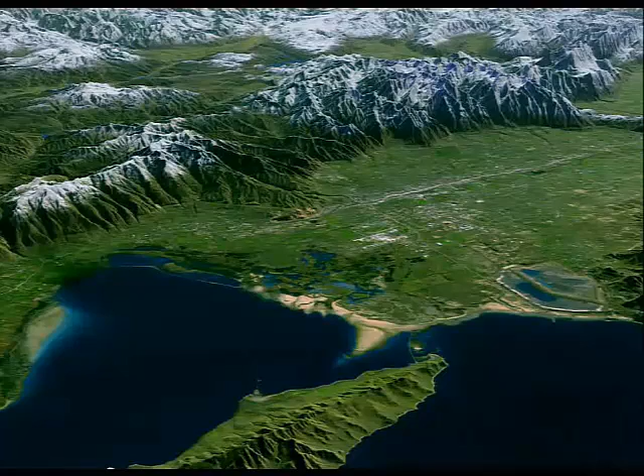City Creek Center is our case study for this session, and we've kind of already introduced ourselves, so we'll skip right over that. City Creek Center is located in the Great Basin. It's in Salt Lake City, which is at the foot of the Wasatch Range. The valley there has a population of about 1 million, and the city itself has a population of about 200,000. The site is a 23-acre site, which is 2 blocks, located right downtown Salt Lake City. And it's on the path of the original course of City Creek.

City Creek is important to the developer, the Mormon Church. They have a residential development arm called CCRI. And they basically wanted to celebrate the role that City Creek had played in the settlement of Salt Lake City. The pioneering Mormons who settled that valley in 1847, they camped next to this creek during their first year there. And they diverted the water, flooded some land, and were able to plant some potatoes, and those potatoes got them through their first winter.

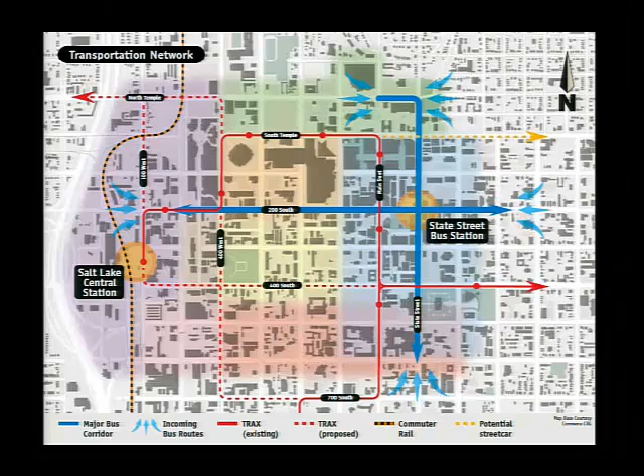Today, City Creek Canyon is a dedicated open space, and the water from City Creek is still used for agricultural as well as domestic water use. The project site is directly across from Temple Square. This dark area is the site, and it's also adjacent to the convention center, and it's well served by mass transit.

A typical block there is 660 feet by 660 feet. A city like Portland, Oregon, which is much more pedestrian friendly, you could fit 9 blocks of Portland into one of these blocks in Salt Lake City. So the key was to break up those large blocks and allow cross circulation for pedestrians.

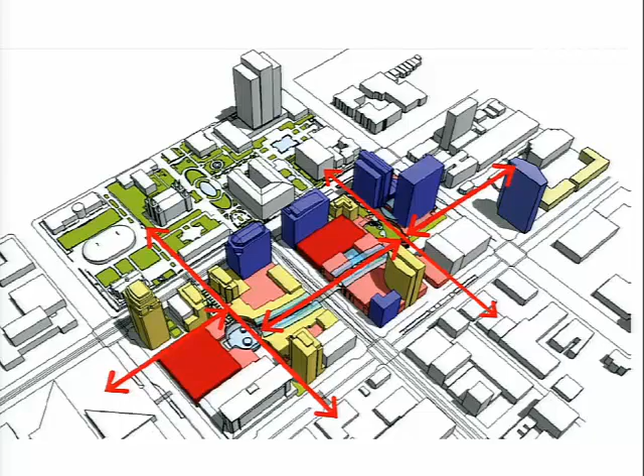This is our final illustrative plan, and you can see there's cross circulation through the site, and the primary feature of the circulation route is a recreation of City Creek. It has creek elements, large cascade elements, and also some oxbow type features. The developers also wanted some of the courtyards populated with more formal and interactive fountains.

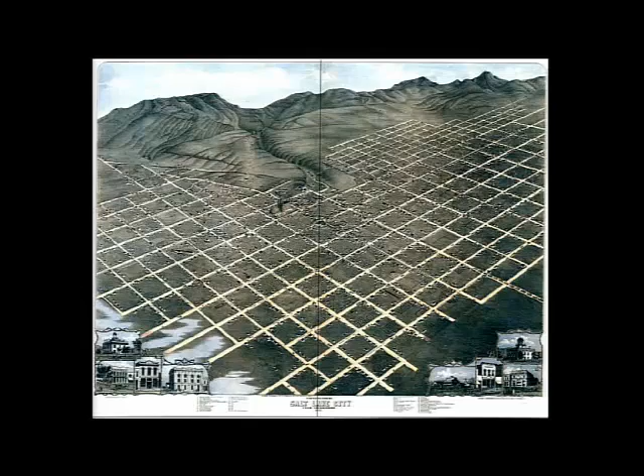In the beginning of the design process, the developer told us the history of the creek, told us how important it was to the founding of the area. And they showed us images like this, and said this is what they want in this project.

And we really struggled when we saw an image like this, and we knew what the program was: 2 stories of retail over a 5-story parking structure. We really scratched our heads, and they kept sending us pictures of the real City Creek. We started to get a feel of what they were talking about, but we didn't quite understand how we were going to make that a reality.

After a number of initial sketches and them telling us we'd kind of missed the mark, they suggested that we hike City Creek. So the first time we hiked it, it was in the winter. And you can see it's a real creek. It's got rocks, it's got water, lots of native plant material.

We studied it. We started to get a feel for the width and the flows, and even some of the different characteristics, like this trout pond up in one of the meadows. And of course that means there's trout in the trout pond. As the design went on, the developer told us not only do they want native plants, they also want real fish -- indigenous cutthroat and Bonneville cutthroat trout, and brown and rainbow trout -- within the mall.

So when they told us that, we realized we were a little in over our head. So we hired a botanist to study the real City Creek, and they provided us with essentially a shopping list of what was there, and an idea of what we could try to replicate within our project.

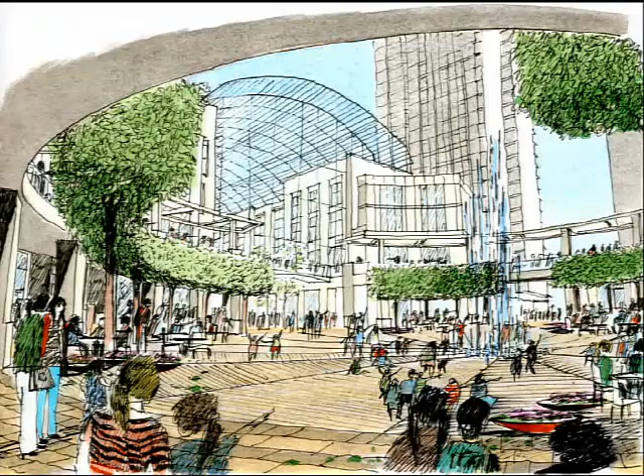It was very useful, and as we did all of this, we got the comfort level from the ownership that we had finally understood what it was they were trying to do. So we went about schematic design and started to incorporate some of these elements, like this oxbow feature we had proposed at one time, a fish pond, and of course some of the plazas that would have the more thematic and interactive fountains.

So through those early design phases, a big part of this was how wide to make the retail space -- how much room do you need to walk. And of course the retail developer, Taubman, who partnered with CCRI, they were very concerned about sight lines to storefronts and cross-shopping. So this idea of the creek going down the middle of the mall was a real challenge to keep both owner groups happy.

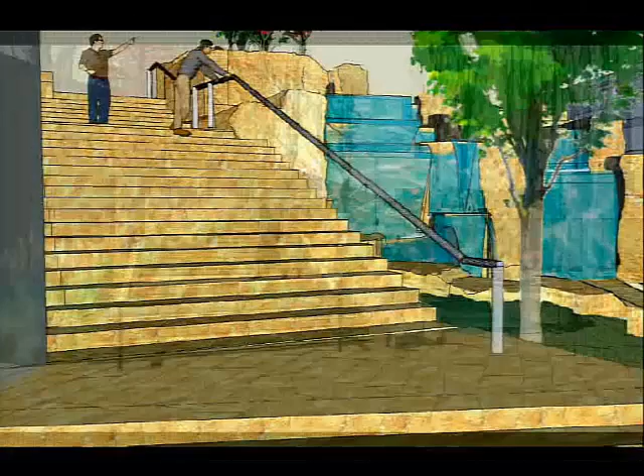But we went through the process and kept refining and refining, and we got to the point where we were doing these SketchUp and AutoCAD renderings, then Photoshop ultimately, and we got the go-ahead that we had figured out what they wanted, and the next step was, how do we build this?

You know, all those pictures you saw of the real City Creek featured real stone. All the renderings we did had stone all over them—paving, seating elements, and of course the water features themselves. At the same time this project was going on, downtown Salt Lake City was beginning to realize they needed to really renovate downtown, and they had a master plan called Downtown Rising.

This project was going to be the first to really kick off Downtown Rising. The idea was that if we set the right tenor for its architecture, its landscape, its quality, its purposeful development, people in other parts of the city could carry on that same kind of design intent. They wanted this project to capture and show off the quality that could be done as a redevelopment project in Salt Lake City.

They wanted this project to be kind of the example for projects that followed it, as far as the permanence of the design and the permanence of the materials.

Can I say something? You certainly can. So, two things. One is it was really to set the bar for the rest of the design for the whole of downtown Salt Lake. That's what Ross is saying.

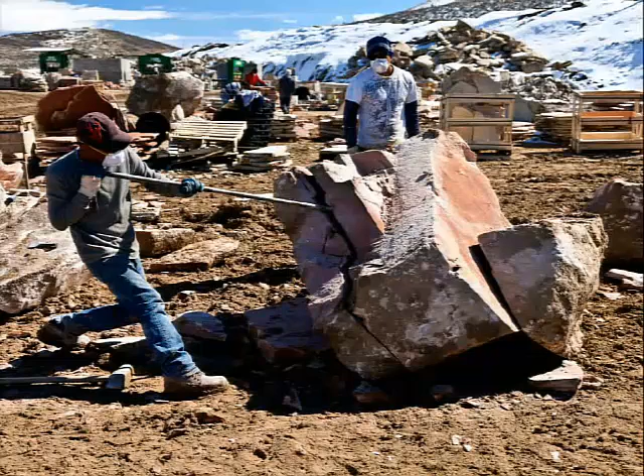Since we needed naturalistic boulders, we basically fell into the Mountain Valley Stone quarry. We went up to that quarry and learned which forms that material can take, whether it's flagstone or cobble—other regionally available material was cobble, used extensively on the project. This is some river cobble. We also had monolithic blocks that we used for seating.

This particular stone came from Wyoming. In addition to the more informal naturalistic elements, we did have some formal elements with more architectural character, and we turned to Cold Spring to select those stones. These stones were also used on many of the buildings throughout the project.

We studied different ways we could treat the material—bush hammering, thermal finishes, etc. In the end, the five different architects involved, across these 13 different buildings that become this one thing known as City Creek, developed a palette that worked across the entire two-block site.

There was one challenge we had with fine-tuning the final selection. When they started honing in on what type of stone they wanted to use, there was a variety of granites, and there was our quartzitic stone that we'd been providing and recommending.

At the time, we always referred to our stone as a really hard sandstone, and that caused a lot of problems, because the first thing people hear or think of when they hear sandstone is the Grand Canyon or Arches National Park—places with soft stone that will literally wash away under the right conditions.

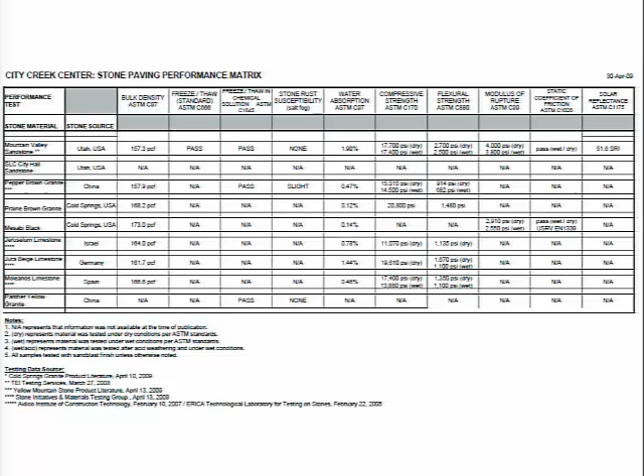In particular, some members of the Taubman team, the retail developer, basically said you never use sandstone horizontally—you can only use it on the sides of buildings. In the end we showed that the Mountain Valley stone was really a contender and was able to withstand this use.

The image I showed earlier of that retail corridor, the primary Galleria space of the mall, involved a lot of back and forth between the CCRI arm of our client and the Taubman retailer side. We went from 30 feet wide to 45 feet wide, and we kept changing whether the creek was 5, 6, or 7 feet wide.

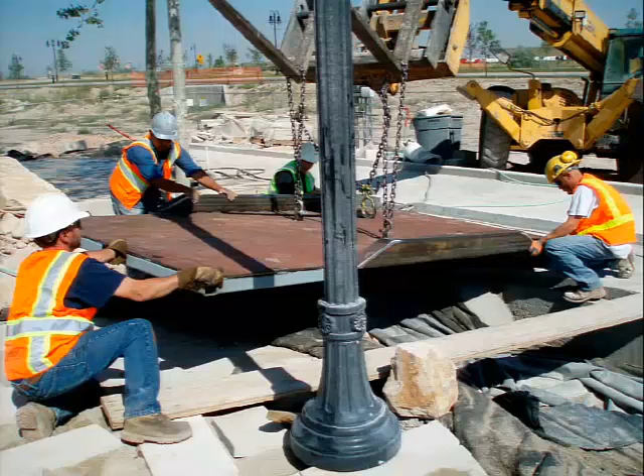It became so uncertain that once we had something we thought would work, the clients decided we'd better mock it up before going further into design to prove that it would work. So on a remote site, we built a 50-foot long, 35-foot wide example of what would be the primary condition through the center of this retail center.

It included cast iron bridges, which would address the retailer's desire for cross-shopping, and all the different paving patterns we were developing during this design development phase. We even experimented with a couple of different materials.

We included the light poles, planting, boulders, slot drains, and drainage elements for these trees. These trees are aspens that really shouldn't be living down in the valley, but we were able to find a grower low enough that we could use that plant material on this site.

We also had the advantage of using this mock-up, really a design test mock-up, to flesh out design elements like how we'd treat the stone edge, and how we'd incorporate the riparian plant material required for a habitat that would support the fish.

Once this mock-up was completed, we had about 30 representatives from the church and Taubman come out, and we even put fish in it. We ran it for a day with fish in it, and we left knowing that we had something that would work.

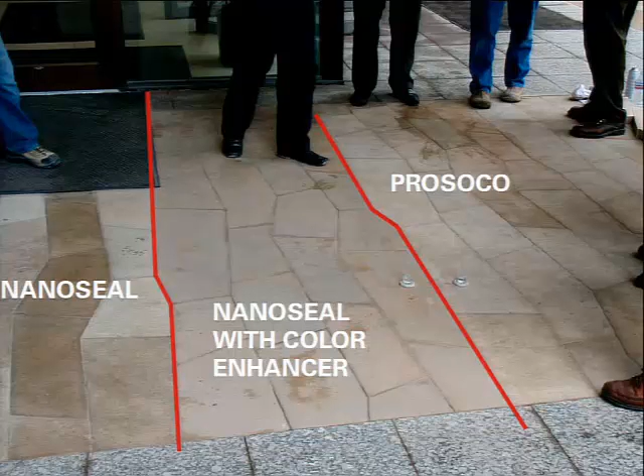So the next challenge, in addition to that mock-up, was that Taubman was again very concerned about the sandstone. That issue kept coming back, though they got away from worrying it couldn't handle freezing because of the data we showed. Their concern then became what happens when you spill ketchup, mustard, or chocolate on it.

So we did another mock-up in front of one of the existing towers that wasn't affected by this development. For about a month, they let pedestrians walk back and forth across it and tested different sealers. They ended up settling on the PROSOCO sealer after this.

Since the stone was really locked in now, SWA needed to become educated about how to detail this stone and its limitations and abilities. So we went up to the quarry and spoke with Luke. This is where SWA was really great to work with.

They had a desire to learn exactly what we could do with the boulders, and came out countless times to look at boulders and climb through the boulder piles. The quarry is a boulder quarry—we don't have real consistency in our boulders. They could be fist-sized, or they could go anywhere up to 400 to 500 tons apiece.

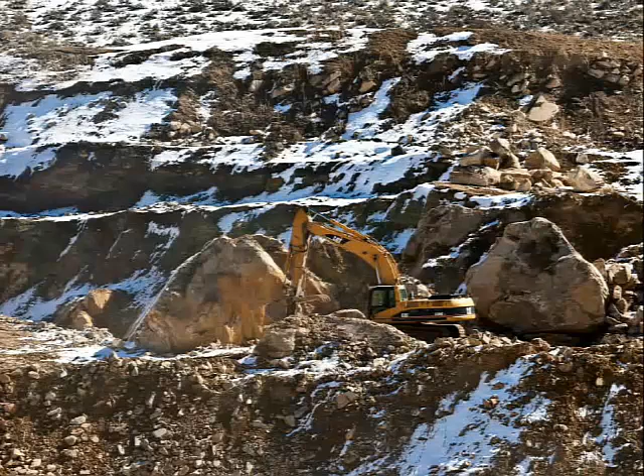So we don't have that consistency in the boulder sizes, but they were willing to come up, sit down, talk, and freeze to death, because this was all going on during the winter time. If anybody's been to Utah, you know that it will be cold.

With the boulder quarry, we do very little blasting. The quarry has been around for over 100 years. It's been used all over in Park City, any Utah area, and has done extremely well with the freeze-thaw, something the clients weren't quite sure of, but we had the data, like Ross has said, to prove that it would last with this application.

So you can see through some of this, the boulders and the sizes of them. That's snow. So some of the challenges we get as we go through the quarry involve the big boulders. Some can be up to 10 to 15 feet tall and weigh well over 100,000 pounds. The way we deal with that is we'll plug and feather it, and use an expandable material that overnight will expand the rock and split it in half, lifting up to 24 tons.

At times we have to use 2 or 3 of those to roll some of the boulders around so that we can use an expanding concrete in them. We'll drill them, put the concrete in. During the winter it takes 2 to 3 days; during the summer when we drill and split them, it'll usually take a day. That's our method of breaking them down into more usable product.

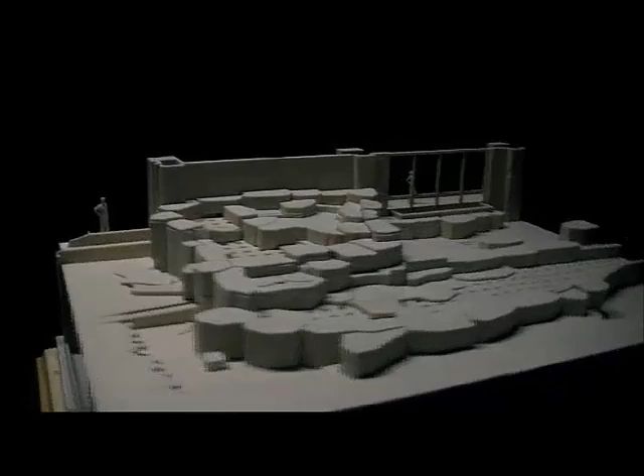You can see here there are models that we used not only in the design process to get ownership to sign off, but we ended up using these models out in the quarry to help find boulders that could become these individual pieces.

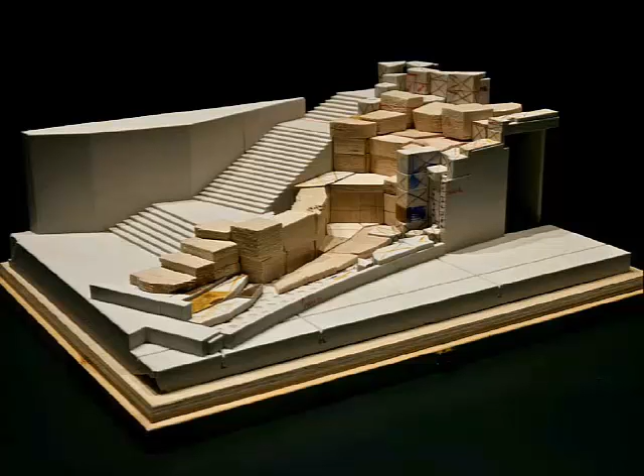During the design process, the ownership would come in every now and then and review things. 'Oh, well, I want a better sight line into the food court,' and we would have to adjust the model. Every time you go into a 3D printing process, it's a little time-consuming and fairly expensive. Each one of these rectangular models is about $12,000 to $15,000.

So we started changing the pieces out of foam or balsa wood rather than keep reprinting it, because we had continual changes to it as we were finishing the design. We also ended up finding particular boulders out in the quarry that maybe didn't quite fit what we had modeled, so we would reshape boulders out there and then change the model again to reflect that.

There were a lot of boulders for this project. I think it was 367, if I remember correctly, in the fountains, but there were over 800 total, including the creek beds. Special selections, and we worked very closely with KEPCO on the selection process.

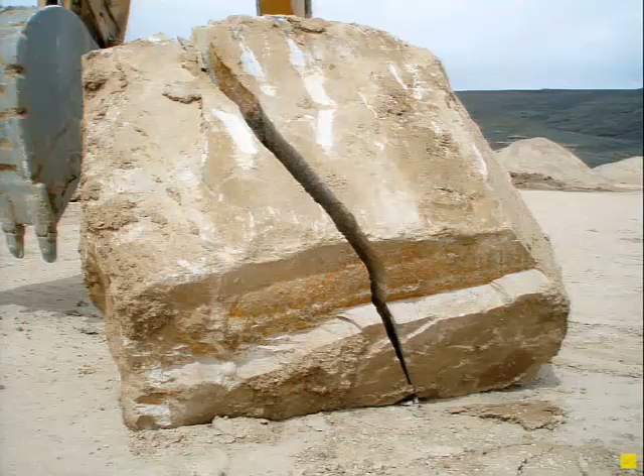Part of the process as we were out there selecting these boulders was Jeremy, Ross, we would come out, we would have a bunch of boulders selected for them, we would tag them with our tags of what sizes they were supposed to be, and then we would photograph them, and the boulders come out of the ground. The quarry is anywhere from 200 to 385 feet deep, so coming from that depth to the surface as we were digging and pulling them out, they're wet, so they're still green - they haven't seasoned and dried out yet.

A process that we would do with them was we would take them and bury them under anywhere from 6 to 8 feet of soil to try and keep the moisture from freezing and cracking the stone. As you can see in that other picture, that one had a giant crack in it, and sometimes it worked for us really good and sometimes it wouldn't. Sometimes we would pull them out and then we'd have to frantically try and find a new boulder that was that size for them to look at.

This is something I had never even thought was an issue - that you can't just take a boulder out of the middle of the earth and just bring it up and start using it. Things like this big crack of a boulder - Jeremy and I would almost know these boulders by name at some point. It's like, oh no, we lost H4, and so then it's back to the hunt. So the seasoning was something new for me.

Okay, this is what's known as the flagging process. This is the material that was used in the creek side that Outside the Lines purchased. As you go through this process, you'll see that we're high-grading this into 1-inch material, 1.5-inch material, 3-inch and 4-inch material. As we go through and we plug and feather - this is a traditional method that's been used for thousands of years - as you go through it, when you split, you have to look, listen, and feel as you're splitting the stone.

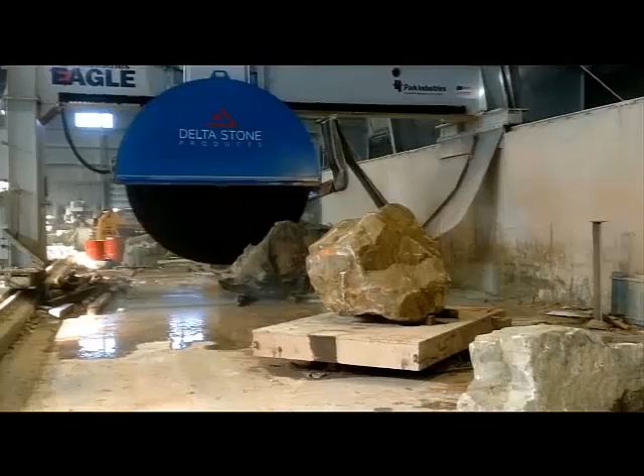This presented a challenge as the fabricator. Typically you don't have your customer come tell you how to cut your rock—there's cut tickets and drawings, and you cut based on what you're trying to get. But in this case, because of how everything had to come together, Jeremy would come in and he'd lay out the stone. This is a custom turntable we built for our big saws.

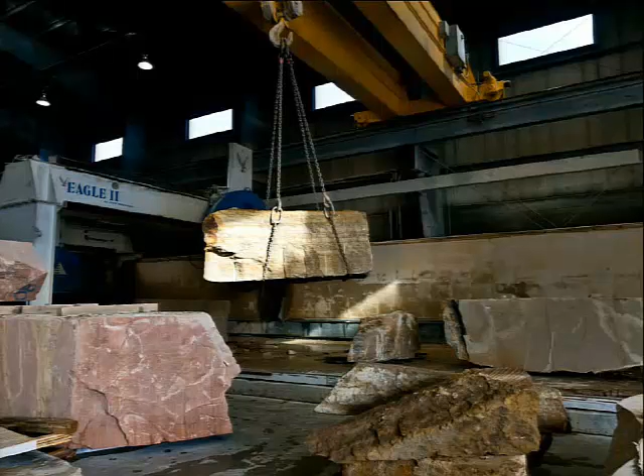Those are 12-foot diameter blades. We built this because every boulder had between 1 and up to 10 cuts that were never perpendicular or parallel. This aided in speeding up the cutting process and made a huge difference in quality and accuracy as we were cutting.

One thing that would happen is they'd be out on the mock-up, which he'll show in a second, and Jeremy would come in right before we were about to cut a boulder—because we were cutting it as they were building it—and as this evolved, he'd say, wait, we got to move it an inch. Our operators were almost pulling their hair out, but luckily we had a good team and we all worked together, and it went really well.

As you can see here, that's probably an 8,000-pound boulder that now only weighs 1,500 pounds. Most of the rock is actually cut away to leave the natural face on the outside. That L shape on the left of the boulder would actually present itself as a natural looking solid boulder if we turned it the other way, but in reality 3/4 of it has been cut away.

The mock-up that Aaron was just talking about involves 2 parts of engineering design, particularly in Salt Lake. One is that it's actually in a seismic area, and because of that seismic movement, each of the areas that Ross was talking about—different buildings and parts of buildings—actually met and had movement joints, and believe it or not, ended up right in the water feature. We've got these big 6-inch movement joints that we had to accommodate and allow for in the actual water feature itself.

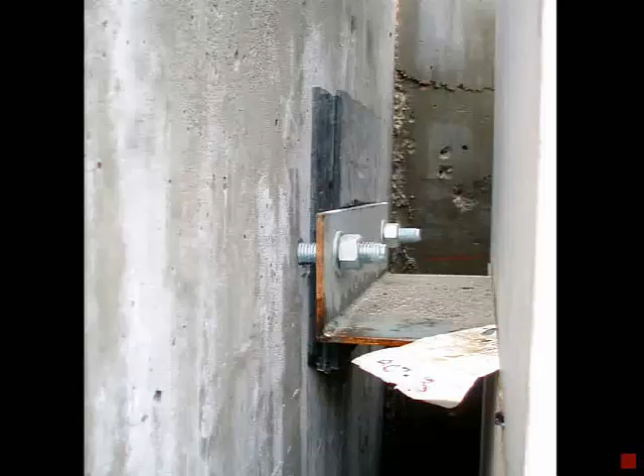The other part was, as you can see, you're talking some seriously large boulders needing to be restrained so that if there is an earthquake, the boulders stay where they are and don't tumble down. This is just a mock-up detail—on the actual mock-up we were just using them to hold them in place from a gravity perspective. But typically you're talking 6,000 or 7,000 pound boulders with a 50-pound attachment system and anchor bolts that cost $70 each.

That all had to be waterproofed and detailed and coordinated carefully between us and the installers. Another very big challenge on this project was the schedule. There was a date established that the retail center needed to open, and because of the complexity of a lot of these stone elements, in particular these large cascades, it was determined by ownership, the general contractor, and the subcontractors that there really wasn't the ability to build this on site one time during the construction schedule.

So it was agreed that a mock-up, dry fit mock-up of the entire cascade would be built near the fabrication facility. A replica of the structure was constructed about an hour and a half away from the actual project site, and once that structure was completed, KEPCO began installing the boulders.

Yeah, a lot of snow. And it was kind of like a first install. These are the very first 4 that went in.

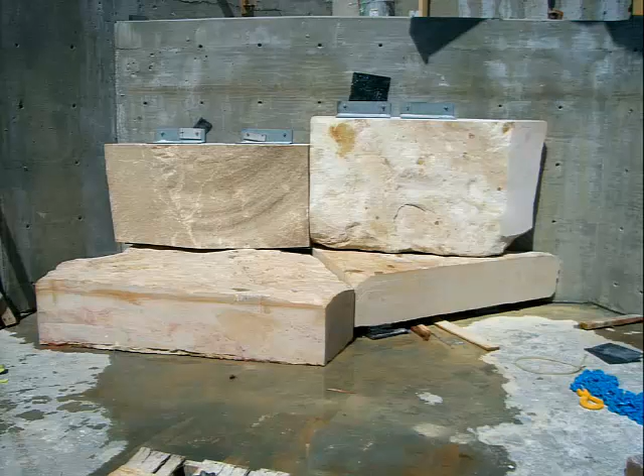I remember the day I was called up to review this with Jeremy and talk about this idea that we're going to just have a butt joint between these stones, and the challenges that would present for a company that typically does cut stone down to 16th inch dimensions.

All of a sudden we're involved in a project where you want everything to look natural, and to tell your guys that if they chipped the corner off, it didn't actually matter, for the first time in their whole lives. As you can see in that very first mock-up, there are some big corners missing off those stones and nothing really lines up, and there was a lot of discussion as to how natural we wanted it all to look.

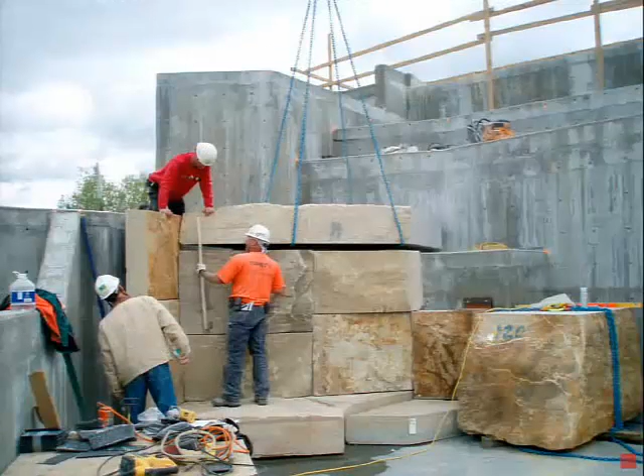Ultimately the end result was the most critical part, so each of those rocks was actually trimmed down and the corners knocked off, and the boulders were lowered down. You can see standing there that the gaps have all disappeared, and the right-hand stone got rejected because it was the wrong color.

It was a big learning curve for all of us, that creating something that looked half natural, and in the end very natural, was going to take some craftsmanship.

A lot of discussion went on as to the actual joint size between boulders. I don't think we're quite up to the Inca scale where you can't get a $100 bill between these stones, but ultimately most of the joints are down to the 1/4 to 3/8 inch dimension, which when you're dealing with 7,000 or 8,000 pound natural boulders was quite the challenge.

Here you can see the kind of shapes of the boulders as they were stacked up, and it's starting to get a fairly natural look.

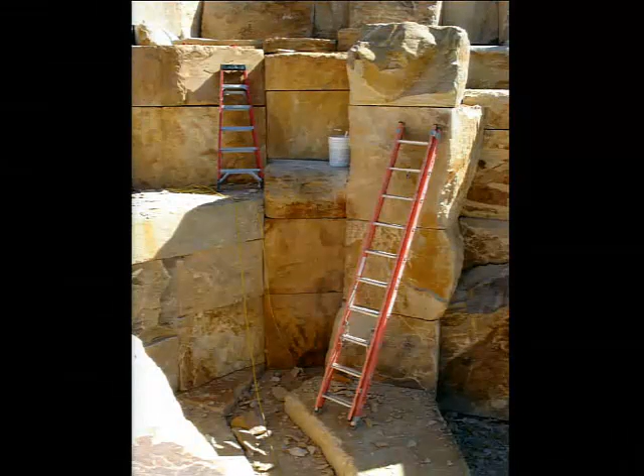Again, there was a lot of coordination between the quarrier, between Luke and Aaron and I and Ross, and a lot of conversations where we were tweaking things and chipping things off to make it look more and more natural. So it's big, it's a big mock-up.

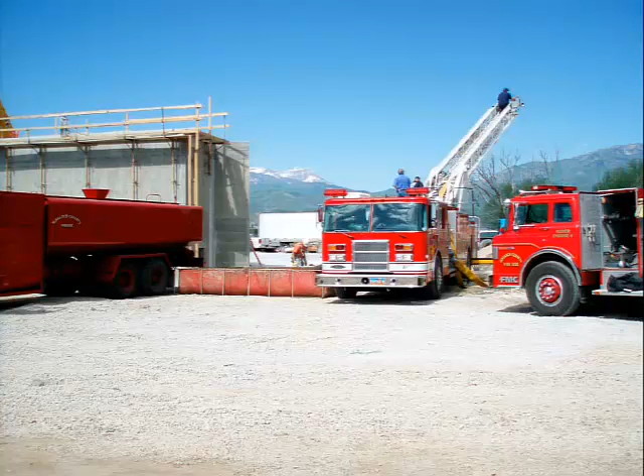One thing we had to do as we were producing this with KEPCO is we'd get the boulders in a day or so before we cut them, and they wouldn't be able to lay them out until the day before we cut them, because they didn't know what they needed yet — it was this ever-evolving animal. The ownership also played a very active role, much more active than I've had on other projects.

We were about maybe a third complete with this mock-up, and ownership said, 'We want to see water flowing over.' I was like, 'We're not done yet,' and they said, 'No, we want to make sure this is going to look right.' So Aaron was able to work with the local fire department.

Jacobsen, the contractor, came to me and said, 'What are we going to do?' I said, 'Well, we'll get you water.' So we called the local fire department, and they were way excited to bring out their new toys that have probably never been used in real life.

So we pumped water up here, and we were able, on a small scale, to recreate what the water was going to do. Ultimately we ended up going a different way because they wanted to see water on a more regular basis.

This was the first water test that we did, much earlier than we wanted, but it was an opportunity for the owners to give us feedback on whether the flows were right and the texture of the boulders and everything. They were, like I say, very hands-on throughout this process.

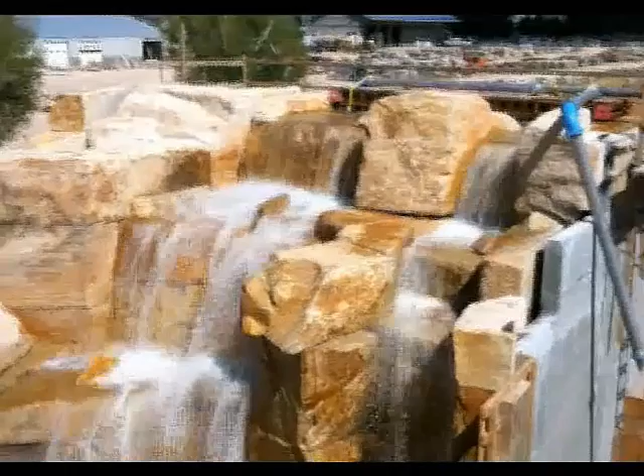Those are my kids — not climbing on the rock, with the process. Every time we'd turn this thing on, the different owner groups would come up, and they would tweak that one, add a boulder, and of course that rippled effect back on the...

It actually went down to the project site. I think there's 1 or 2 more videos in here real quick of the water.

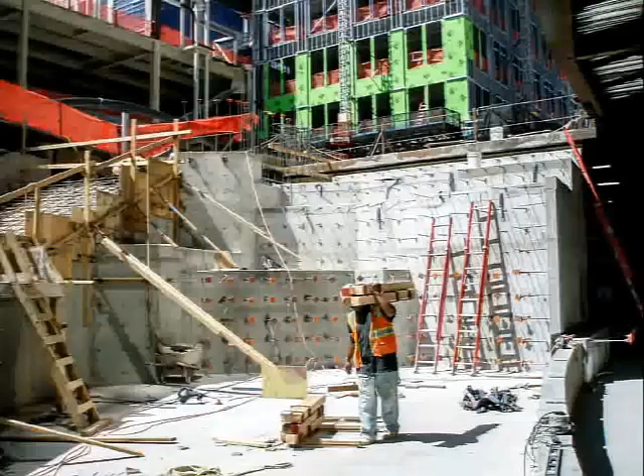So the mock-up is fine-tuned and signed off by the ownership groups, and then the next step was to disassemble it and bring it down to the project site. So here's that same structure, but this time the permanent one, down in Salt Lake City.

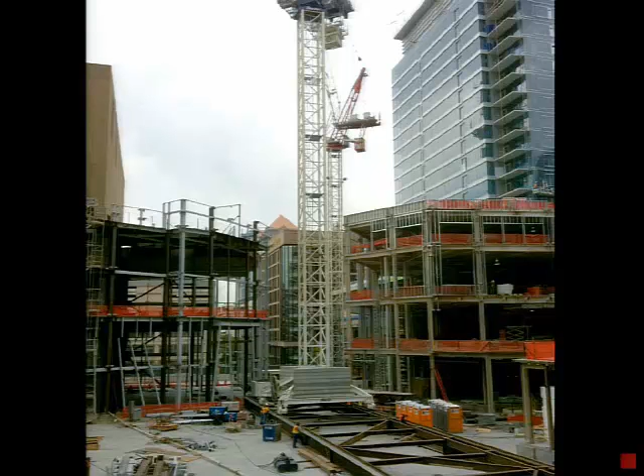They've got the waterproofing on there, and this particular cascade is located kind of in the middle of the block. The general contractor had some challenges there. From an installation perspective, we were involved heavily with the general contractor in the crane selection as to how they were going to get these huge boulders into the middle of this job site, bearing in mind you're on 5 levels of parking and can't drive a forklift anywhere.

It's a very small one. This is a 6-foot-tall man, and that's a 5-foot-tall rail for the rail crane. So it was decided to put this rail crane in, supported by individual structural members that were poked up through the slab down to the structure below. But even so, this crane had like a 12,000-pound maximum lift capacity, and we had a boulder that even then we still had to cut in half just so the crane could pick it up.

And this crane wasn't just for the boulders, it was for the rest of the architecture being constructed at the same time. So there was a lot of jockeying for crane time - there was arm wrestling going on, actually. But ultimately that crane did its purpose, and we were carefully coordinated with everyone else.

As Ross said, the schedule was very tight. On site, we had just over 6 weeks to install what had taken over 6 months to build out in the field. Each of the boulders, as they were dismantled from the mock-up in Heber by the fabricator, was loaded onto a steel frame so that it could be lifted up and over the other buildings safely, because chains have the possibility of slipping on boulders and things like that.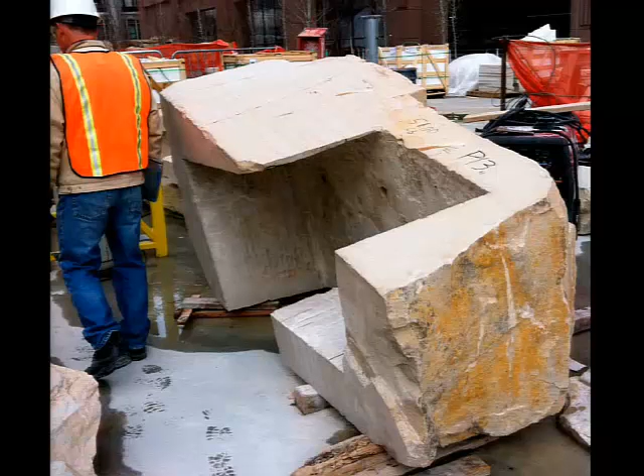This pitch is moving it locally from when it had been unloaded from one of the metal frames onto and installed into the actual water feature itself. Here again, you can see another boulder that's been burrowed into, as we say, and it actually spanned over one of these big seismic joints, so we were using the boulders to hide the joint underneath.

And these seismic joints not only ran horizontal, they also ran vertically, and sometimes both at the same time, like this one. It posed a challenge for us aesthetically how to treat these. It was a slow process, but we developed some techniques with sealant, and ultimately we did some faux painting and carried the colors and textures from the adjacent rocks over this sealant.

And yet again, the owner was very anxious to see the water turned on, so we're not done with the fountain yet. The pumps just came on in the fountain pump room, and they said, yep, let's turn it on, let's see how the water's going to flow. So they came out to the site all the time.

So we haven't really shown you a lot of pictures of the whole City Creek development, but the water features, both these natural ones and the ones we're going to get to in a minute, were a big, almost a tourist attraction when the thing opened, and they still are - people actually come to see. It's hard to appreciate really how big that waterfall is. You've got an 18-foot drop there, which for any building is a large cascade to create.

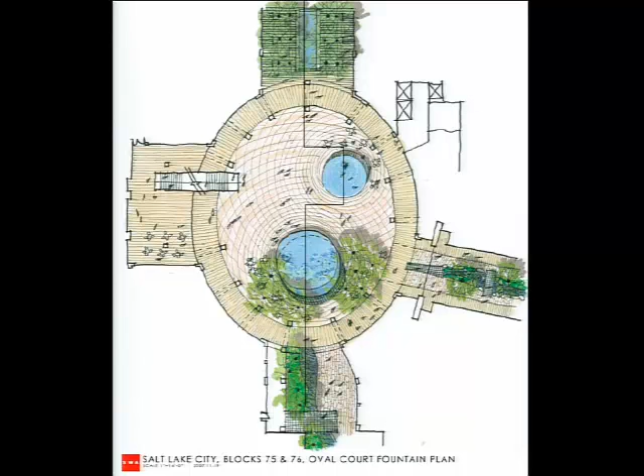There are other cascades as well on the project, and also some fixed water features that Ross will get to in a minute. But yeah, let's talk about the formal water features. SWA collaborated with CMS, a fountain consultant, and through the schematic and DD process, we were the team that developed these fountains.

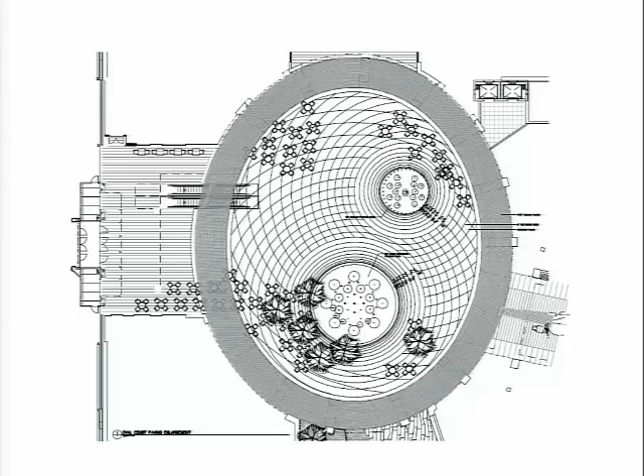And we kept refining them, and ultimately what we ended up with was a children's interactive pop jet fountain, which is the smaller circle, and then a water table that had programmable lighting and water. At this time it was not really going to be a themed event with music, but it was going to be a very interactive and programmable water feature. These are some of the early concepts and renderings.

As it turned out, the church decided that they really wanted to have a world-class fountain, and they came to WET, who developed the Bellagio fountain among others, to develop unique, never-seen-before nozzles and effects for this project. We'll have some video later on of what those ended up like.

Again, we used the traditional tools when we were in the development stages of the design: clay models, as well as laser cut models. And then ultimately we did turn back to 3D printing. At first it was just to get a comfort of the scale and volume of these elements, but ultimately we used the 3D printing to start to really define the mechanical spaces required for the source basins and return basins.

We also, right at the end of our role in the DD process, did some studies of different ways to treat the transition from the water feature to the pavement. This was a great study that was later not used.

In the process of developing the design for the fountain, it was agreed by the ownership that they wanted a contrasting color from the paving that the rest of the plaza has. So they turned to some of the color palette and stone types used in the architecture. Kathy can speak to this.

Yes, this is our granite. It's carnelian granite, and we're showing it in a rub and sand finish. The next photo shows the tapering effect that you're going to see on the fountain. So this is a sample of that.

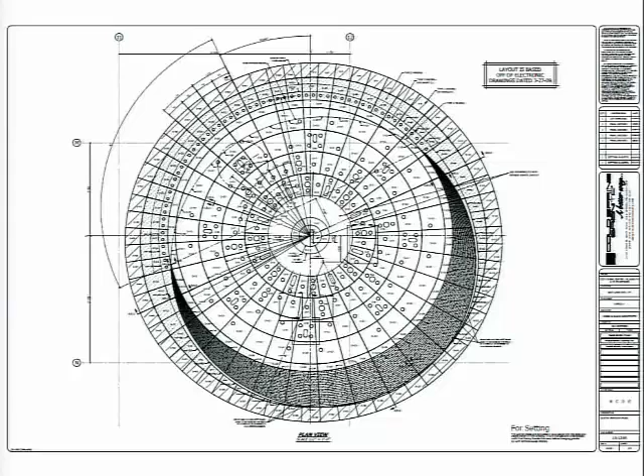And then this is a CAD drawing, which in the next is converted to a 3D model. We used Inventor, the software. But you can kind of see the complexity of this fountain that we were going to fabricate.

And we also, I said earlier, we have a bronze foundry. There were some difficulties in sourcing the bronze, so we were able to come to the aid and actually pour some sheets of the bronze. Then using our stone cutting techniques with water jetting, we were able to form the pattern that they needed.

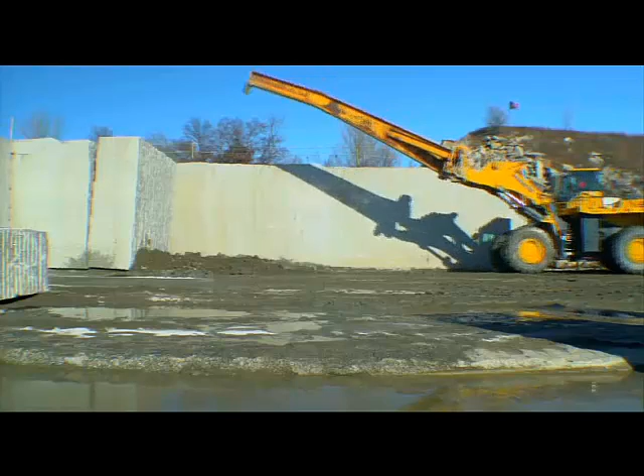This is the actual quarry. It's in Milbank, South Dakota, about 120 miles west of our facility. Unlike Luke's quarry here, it's a ledge quarry. So basically it's a drive-in quarry where we mobilize all of our equipment to cut using diamond wire, freeing the stone from the ledge.

And then this machine tips that into the loaf. The loaf can be anywhere from 10 feet long by 5 to 6 feet high and wide. So you'll see this. Okay, tip. A nice little struggle to pull that block over. Go.

It's always an exciting moment for people that come to a quarry. That and the blasting—actually the blasting in our quarry is very minimal. We use the diamond wire cutting to minimize the fracturing of the stone.

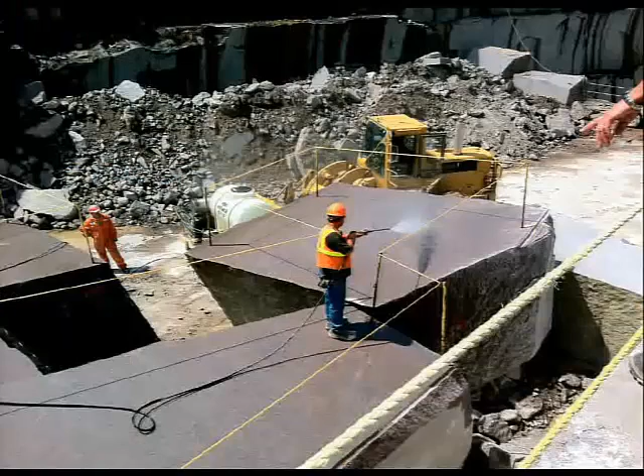So in these photos, this is the loaf, and we're looking at it. We want to carry through the design intent for the designer, so we have to cull out areas. We wet it down to see the markings, the natural markings of Mother Nature, and then this gets cut into blocks. And then it gets transported to Cold Spring, the fabrication facility.

This animation shows the complexity we were working with. It's kind of a ramp and twist of the material, so it's not slabbing it flat—we had to slab it very cubical. You can see the things we were challenged with in terms of cutting and profiling this design, these different pieces, and they also had to match up.

We use a lot of automation in our processing and fabrication, so we use 5-axis saws, single wire cutting, and machining to get this actual profile.

That's one of the pieces, and as you can see, I'm going to go through a couple steps. The first step was to just single wire cut it to get the profile, and then it's going to take another couple steps, but you'll see even in the mock-up it's not even completely cut.

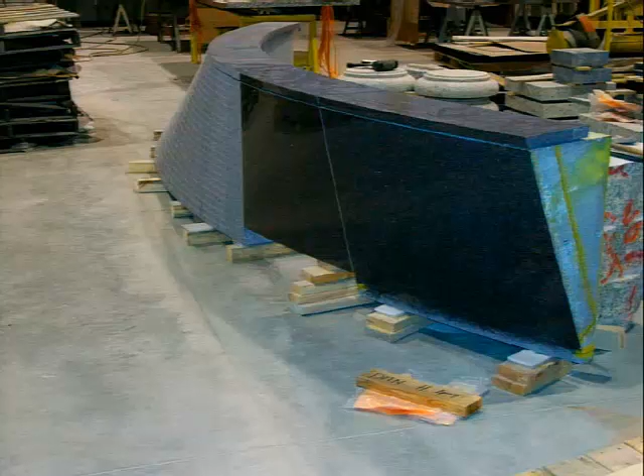Our goal is to eliminate any site work when it gets to KEPCO, and to that end, you dry fit the pieces together at your facility before they're shipped. KEPCO was actually out to our site for this mock-up and approved it. You can see the other finish that was used was a polish, and you'll see it as it's installed. But on that piece, it still has to go through another cut in the back so it can fit and accommodate the fountain.

This is the actual finished piece of the bronze that we were able to work through. The bronze was used where we ultimately ended up adding fire to this feature, and it was used adjacent to the fire nozzles.

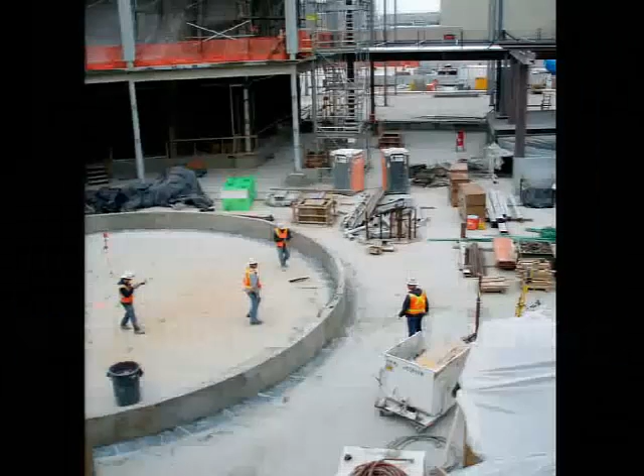Again, the whole project sits on structure, over a five-story parking structure. There's actually a 3-foot interstitial space that you can see with this little 3-foot high wall, and that's where the fountain is going to go. That void space underneath the finished surface of the paving was there to accommodate the different mechanical systems for the fountains. Where we had planting, it also gave us a soil zone for our plant material.

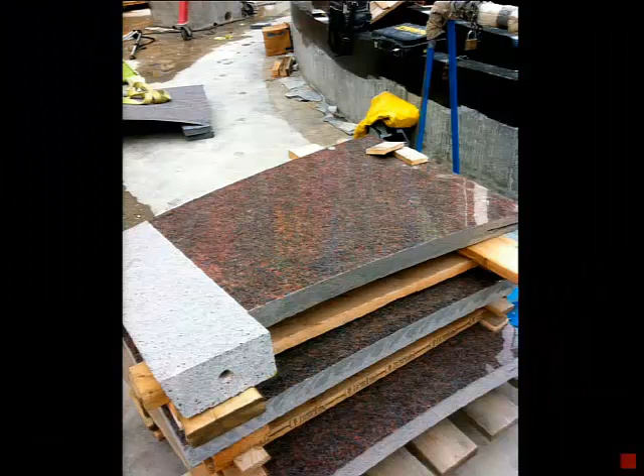As the material arrived on site, KEPCO did the installation. As I mentioned earlier, one of the tricky parts was the fact you couldn't drive a forklift anywhere on the job, so there was a lot of manhandling of the material to move it into position, and we used small gantry cranes for installation with electric hoists, as you can see here. Seems like whenever we're doing these jobs, it's always installation in the wintertime, but that's just how it goes.

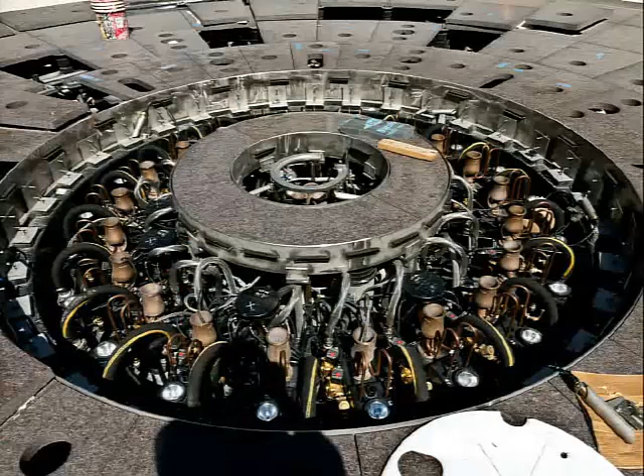There were 175 holes in this that all had to be systematically and accurately positioned so that the nozzles actually came up in the middle of the holes. This is very close to completion. That's the fire nozzles where the brass inlay went. Here you can start to see the critical nature of how things needed to match up to present the rippling effect needed for the water to flow evenly over these surfaces.

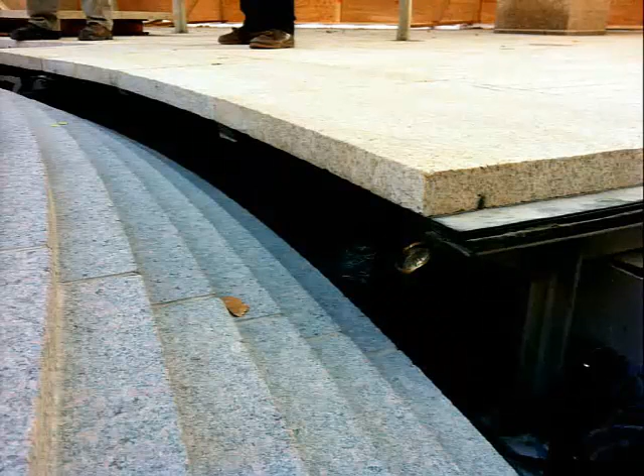In the end, it was decided that rather than putting a grating around the fountain, these stones would actually be cantilevered out via stainless steel anchorage so that people could actually get up closer to the fountain itself.

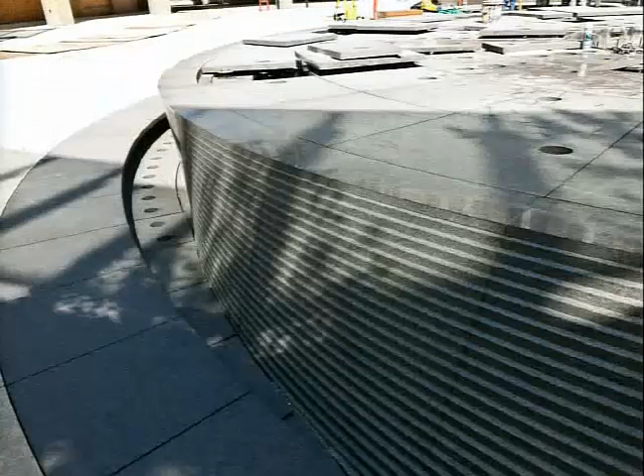This is the transition between the stepping part, and then there's another part of the fountain where there's actually an overhang. As Kathy said, the finish on the stone is also alternating. The steps are actually quite small, only about 1.5 inches high. And then on the other side of the fountain, you've got this overhang.

It's really a water feature to be exact, because you're talking about only 3/16 of an inch thickness of water flowing over that area. People walk up and put their hand in it, because it's really hard to tell that's really water.

In this next video you can see some wet finishing pads just going in if there was any little bump here and there to smooth those out. But the end result is amazing—how thin that film of water is.

Over to you, Rob. The water feature is programmable, and throughout the day it changes what it does. In the middle of the day, it does its big exploding high shooting jets, and then during the evenings, on a regular schedule, the fountain goes through its different shows, set to a 20-minute piece of music.

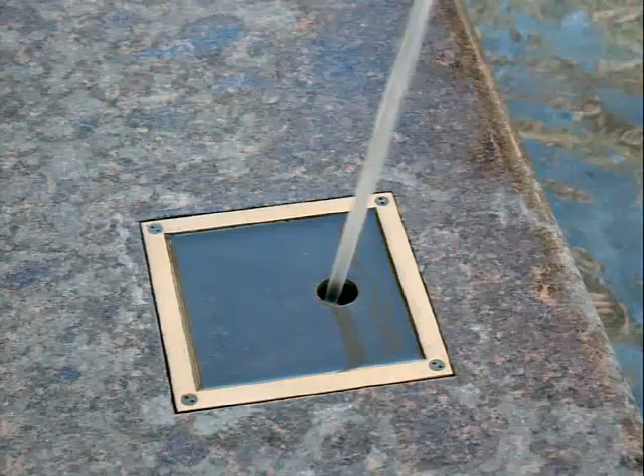These are pretty simple arching jet elements that had some brass components needing tight coordination. WET also designed another unique nozzle for one of the other fountains that's turned out a bit problematic, because any wind will carry the water outside the basin, but I'm sure they're working out the kinks.

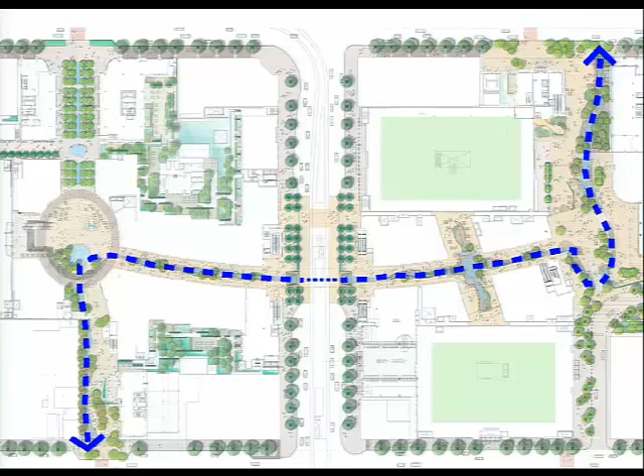Since the project's called City Creek, the creek is the main component. It's 1,300 feet long with 37 feet of elevation change from the upper area down to the lower end. Along the creek we had monolithic stones used as benches, which also act as oxbows, where the water carves out its oxbow shapes.

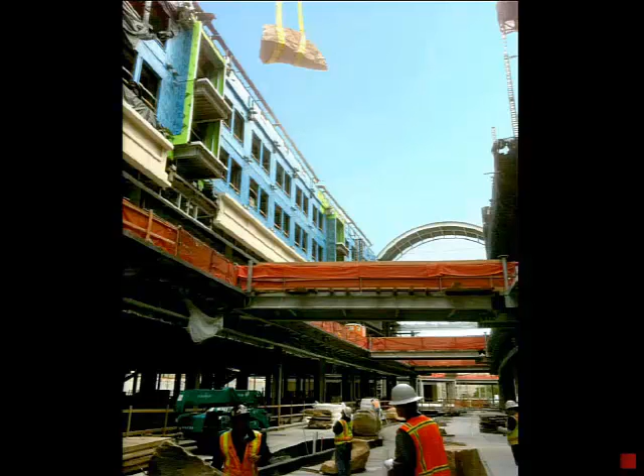Again, we're on structure, so everything is built up from the deck to accommodate the creek element. There was a lot of fighting over crane time to bring in these components. For the creek bed, we did probably 90% of deliveries between 2 and 3 a.m. - that was the only time they'd give us crane time. This was one of those rare days they let us bring material in during the day.

There was a lot of material used in the creek - not just large boulders but cobbles and flagstone as well. We kept constructing straight through; it was probably -10 degrees when this picture was taken. They tented the workspace and provided heaters, and when necessary used heated blankets to make sure things weren't curing incorrectly.

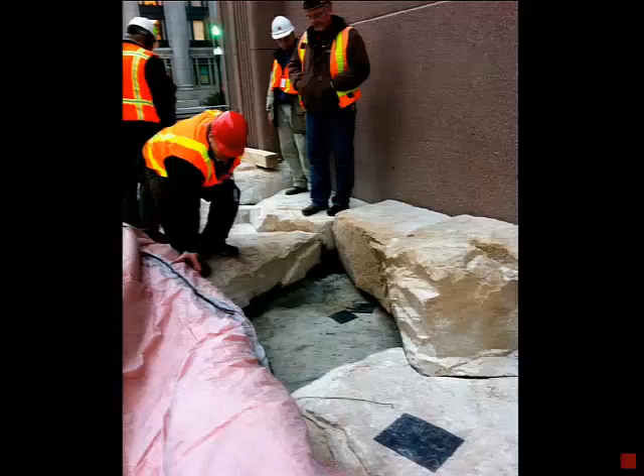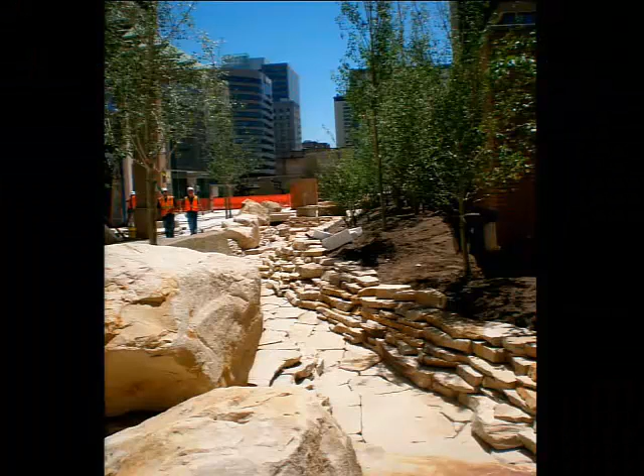It was a real challenge working with masons who were more accustomed to architectural dimensional stone, to get these more free-flowing, naturalistic installations.

As soon as we turned the water on, the owner would come out saying he wanted the water deeper here or shallower there, so we kept tweaking elements as we went. The fountains and cascades interface directly with the architecture in quite a few locations, which was another challenge. We also needed to accommodate fish habitat, so there were certain criteria for the makeup of the cobbles used in the creek.

These fish are actually in their third generation now - it's a successful habitat, and the fish are reproducing.

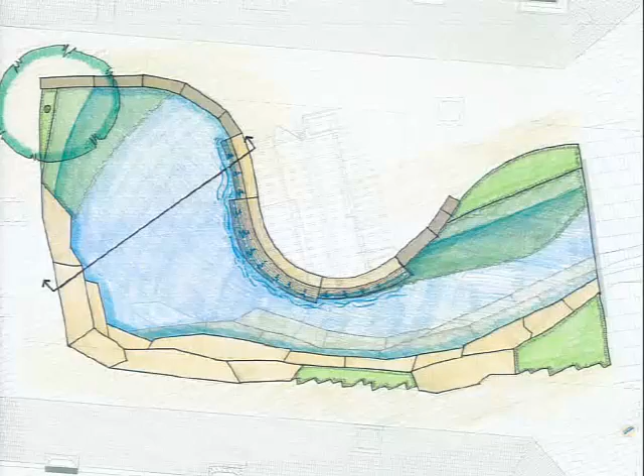Another piece of the puzzle was a water wall element. They wanted to screen an information kiosk from the trout pond, so we worked together and developed this kind of battered water wall. We did a dry-fit mock-up and took the owners out there to make sure they were comfortable with the design direction.

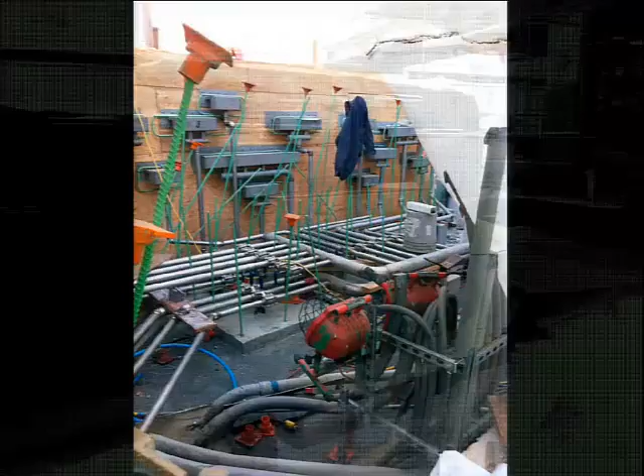Again, a fairly complex fountain system - a series of different weirs at different elevations and widths. I think the biggest challenge was this one, as it was a surprise to all of us. It came very late in the game, but gratefully we were able to pull it off.

I personally was resistant to this because this was our trout pond - I didn't want this more animated piece in what was meant to be a very naturalistic corner of the project. But as it turned out, it's a beautiful feature, and the fish actually love to congregate right at the base of this waterfall because of the extra aeration the water provides there.

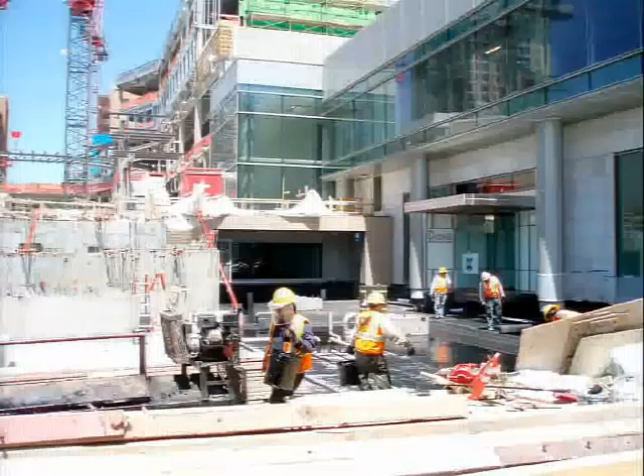Another piece of the puzzle for the creek is the terminus fountain. This is the primary entry to the site from the south. There's an escalator constructed on the left of this image, a grand stair, and next to that stair another cascade. This area also serves as an entry plaza to a residential tower.

This site was right on the edge of the project, so for delivering stone we could pull trucks right up near it - a tower or rail crane wasn't required. It was also the second of the big features constructed, so the masons had gotten a sense of what I was looking for, and the process went much more quickly.

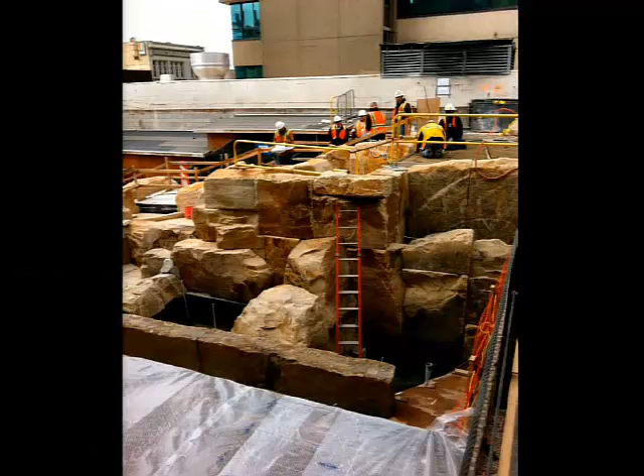In fact, there are more boulders on this one than the big cascade, even though it only has an 8-foot drop compared to the 16-foot drop. And here again we're tightly interfacing with the architectural facade.

Here we are doing the water test, with a lot of fine-tune adjustments. The water element at the bottom was introduced because the residential tower wanted to have something on axis.

And there's another shot of that—I can't remember, you said I was really demanding on this particular boulder? This particular stone was like 18 feet long, and had to be 4 to 5 feet tall. The quarry we got this from was a very rare find. Yeah, it was very special.

I guess in the whole project, one of the things from a KEPCO perspective, it's a bit like Aaron said—the interaction between us in the selection and layout process was the exact same. Typically, we don't go out and select our own boulders, we order them.

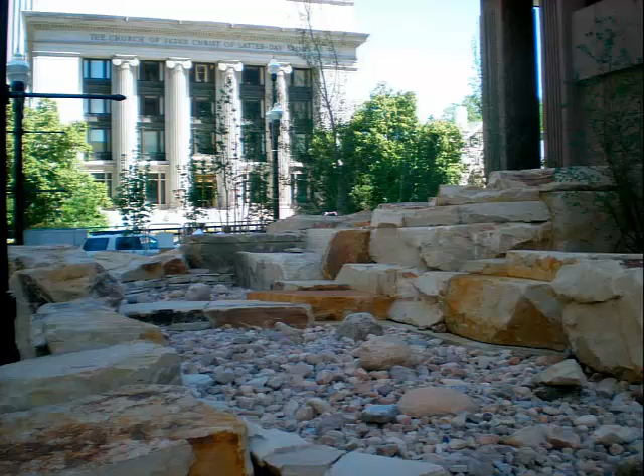Working a lot with Ross, basically for a year he spent driving up and down the canyon—I put 30,000 miles on my car that year, just driving up to the quarry during the selection process almost every day, because you're always hopeful that the next boulder coming out of the quarry was the one you were looking for. With this many boulders you're looking for, it's more of a war of attrition in finding the right boulder to go in the right spot than anything else.

You sort of stumble across one, and after a while, like Ross says, you're looking for H3 or whatever the code was that we had for it, and if you found it, it was almost like you got on the phone and celebrated, because there were a lot of boulders to find. After a while you sort of got them in your head, and you'd wake up in the middle of the night thinking about them. But the end result, I think, is very natural.

As Ross is showing you here, this is the headwater detail. This is where the water first appears on the site.

And it was a challenge. Initially, we were just going to have a pile of rocks and a spring bubbling forth from that pile. But as it turned out, on the surrounding residential buildings, you could look down and see that bubbling source, and it didn't look good seeing the valves and whatnot. So we ended up with water bubbling forth from these two boulders, and it worked out.

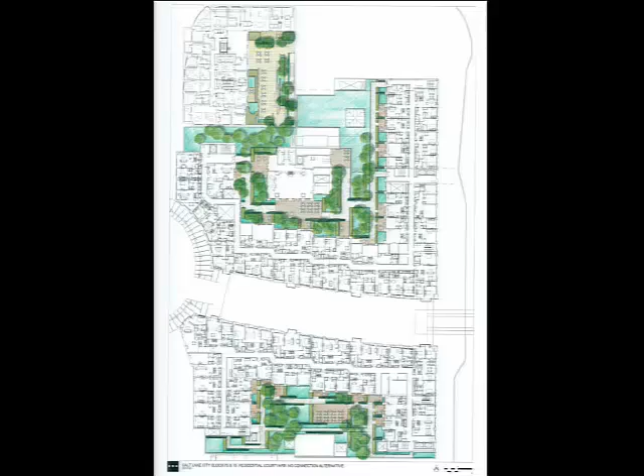In addition to the creek and the cascades, we also used the Mountain Valley Stone on the roof gardens. There's 3 stories of for-rent residential over the retail center, and they each have some amenity decks, and we used that stone for veneer and cap. In addition, on one of the plaza's roof gardens, we incorporated these brick walls as well.

Unfortunately, as we discussed earlier, even though the Mountain Valley stone, the quartzitic stone, tested out fine with the sealer and tested out fine with the freeze-thaw and all the other criteria, we never got over the hump that it was called a sandstone at one time. So the Taubman developer just said no, it can't be sandstone, even though we proved that it would work. So we ended up using China granite for most of the paving.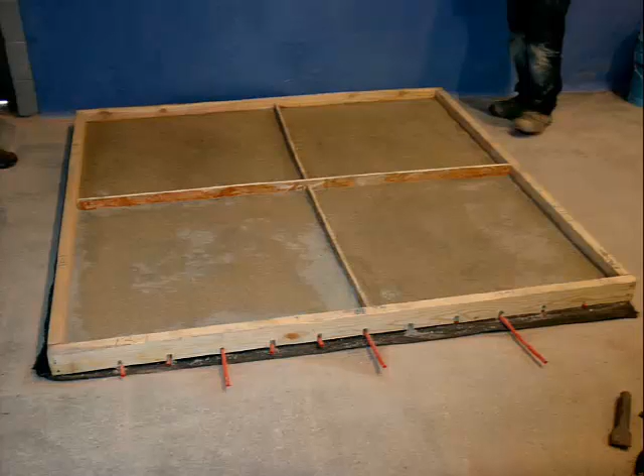In addition to the freeze-thaw concerns, the ownership wanted easy access to the snowmelt tubing. Traditionally, you cast that into the subslab or put it within mortar. Here we developed a 12-to-1 sand cement mix—we had to mock up a couple of different ratios to figure out the perfect one.

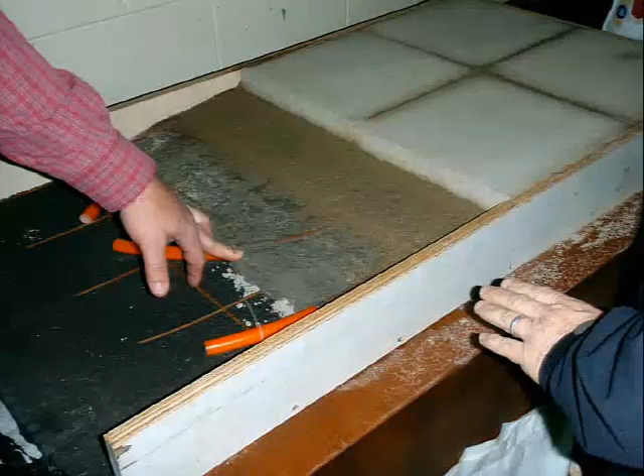They wanted to be able to lift up the sand-set pavers and just dig away with almost a screwdriver—in fact, I think that's what we used in this little picture—to have easy access in case a leak occurred in the snowmelt system. There were 5 different paving contractors on the project, and each one was required to provide a mock-up. These are a series of different images of those mock-ups.

And the mock-up would be dismantled to determine whether or not the contractor had used the material correctly. This is a polymeric sand that has not been wetted properly. Essentially, it rained the day that they were doing it, and they kept doing it, and it didn't work.

Verifying that we had the minimum or maximum loose sand setting bed. Here's an example of the polymeric sand joint sand being properly installed.

This was kind of our magic sandwich across the whole site. The piece down at the bottom represents the structure, and then we have the waterproofing, the drain mat, galvanized mesh to hold the tubing in place. There's a lot of memory on that tubing, so they need to use that system. And then that's encased with a 12-to-1 sand.

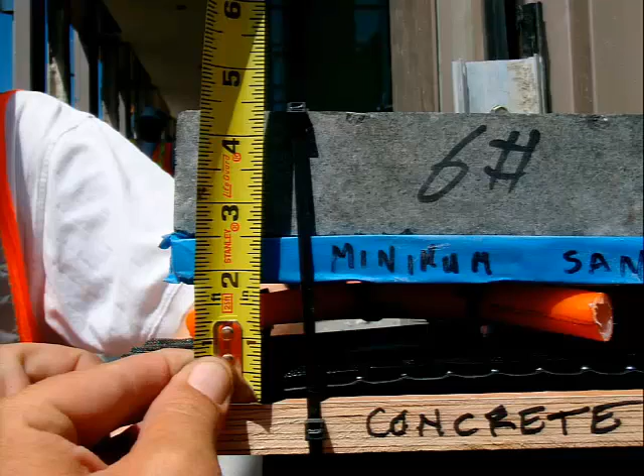We have a minimum of half inch, maximum of 1 inch of loose setting sand, and then, of course, the 2-inch paver on top. All of the paving system was on structure, so they would get the waterproofing down, flood test it, and go to town installing all of this snow melt.

They had some challenges getting the snow melt across the slot drain. We used slot drains wherever we could to eliminate the valleys and ridges. We also had cleanouts for these slot drains, which, of course, we wanted to disappear, so we made sure that the paving pattern went uninterrupted through these, which resulted in a lot of cutting.

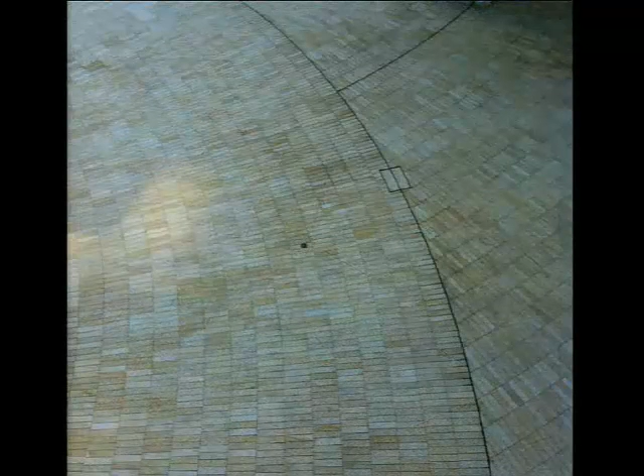We had a couple of different paving patterns that would use the slot drain as a transition point between the patterns. In the oval court, we had a series of concentric circles, radial patterns, and some of those slot drains intersected each other, in some cases creating these very tight sliver pieces where we used a monolithic piece of stone and then put faux joints into it. Here's another example of where these two off-centered circle slot drains are coming to a feather point.

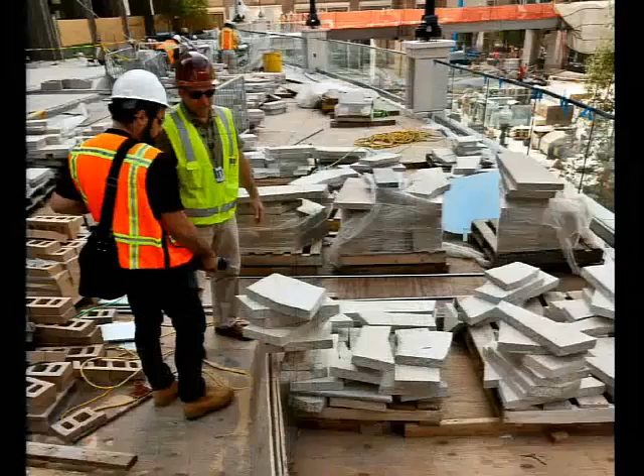The one particular pattern that we developed for this was a 12-piece random pattern. This stone, again, was from China and was water jet cut in China. And the different installers each developed their own method of handling this random pattern that wasn't really random. It was just a series of 12 pieces that repeated itself.

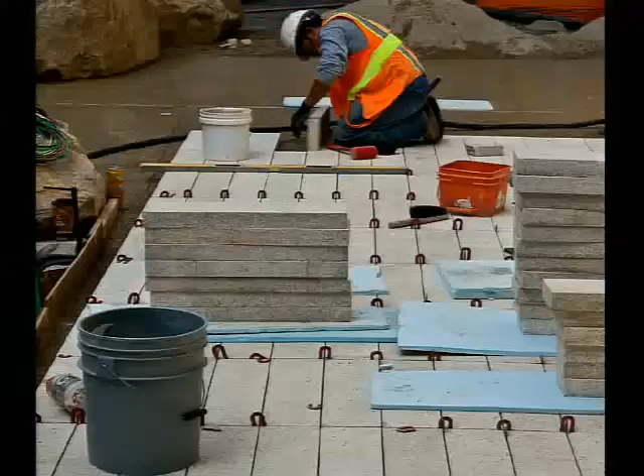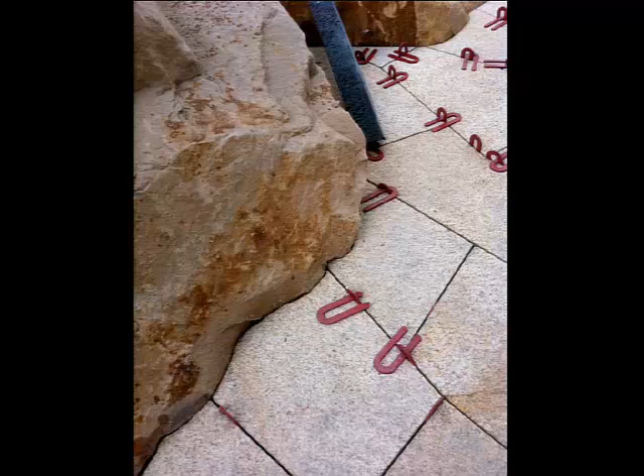There's a lot of paving on this job, a lot of different paving patterns, and again, the challenge of working through the winter. You can see in this photo those large boulders in the background. They need to trim those pavers to fit up against those boulders so that it looks like the boulder was there and we paved up to it. The whole idea here is 'the creek came first,' which was the mantra of our client.

We also had a couple of different edge conditions to the paving at different planters and water elements. We used monolithic stone for the stairs. Of course, those monolithic treads also had to be fit to the adjacent pieces.

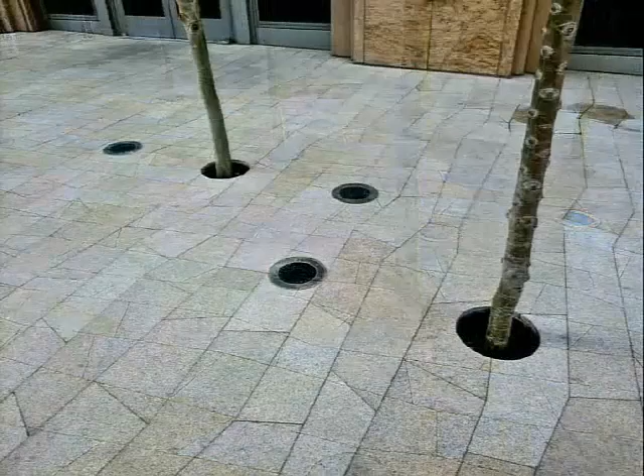We also had a hidden tree well detail that we developed so that the trees just pop right up out of the paving. This turned out to be a really successful application, and we've started to use this detail on other projects.

All throughout the process on this project, there was great collaboration between the owners and the architects, the sub-consultants to the architects, the general contractor, all of the sub-consultants under the contractor, as well as close collaboration between the quarry and the fabricators. I don't know if any of you guys want to speak to some of the uniqueness of this job compared to other jobs you've worked on as far as collaborating between different members of the team.

Well, I'll start with the fact that there's 5 of us actually here still talking to each other. So that actually speaks to a lot of what went on this project. That at the end of it, there was a very good mutual relationship between each of us.